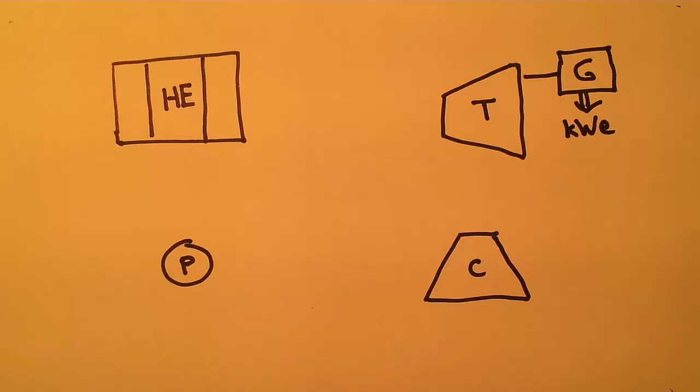From the outset of the project, we had already been given an outline of a potential workable solution. However, we found this design brief to be too specific, and Hal agreed to our revised scope, broadened to cover the following topics: a discussion of available technologies and all potential solutions, description and justification of the proposed design methodology,

detailed outline of design implementation, and complete design for manufacture, including a full set of engineering drawings, detailed parts list and specifications, assumptions, limitations, operating parameters, and expected output. Obviously, the project is centralised on geothermal power, and thus we will not be considering other energy sources, except in a potential composite system. Nor will we analyse the geothermal wells, as all the necessary details will be covered by assumptions.

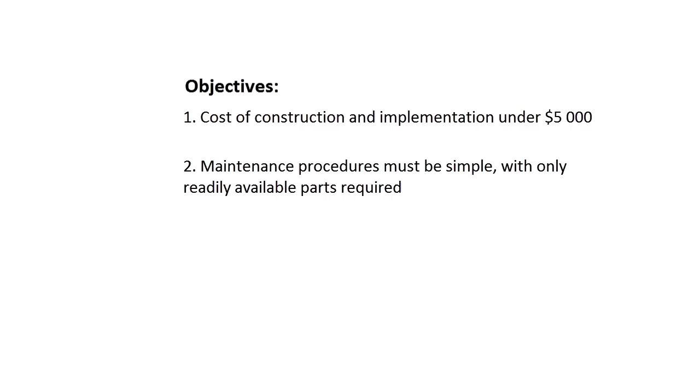Our primary objective for this project is to work with Professor Gensi to propose a simple, robust and economically viable energy solution for remote communities which incorporates renewable geothermal resources. Additionally, we have specified certain goals to coincide with Hal's expectation and desired outcomes. In order of importance, these are: cost of construction and implementation must be under $5,000, maintenance procedures must be simple with only readily available parts required, electricity generation should sufficiently meet basic needs of the community.

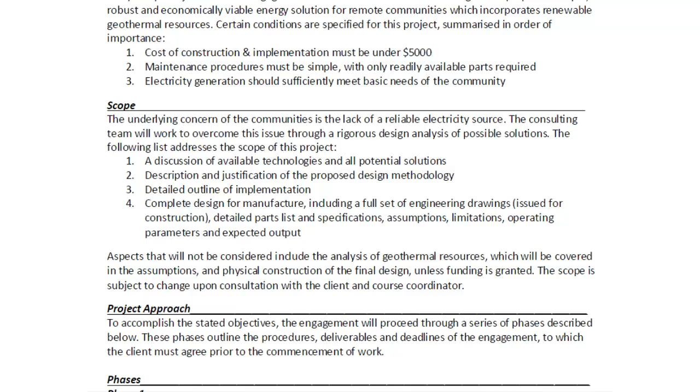We began this project by developing an engagement proposal letter for our client, where we clearly defined our problem, objectives and scope as we saw them. In this letter, we divided our project approach into 4 main phases, outlining the procedures, deliverables and deadlines of the various aspects of the project. The phases take up roughly half a semester each and can be described as follows.

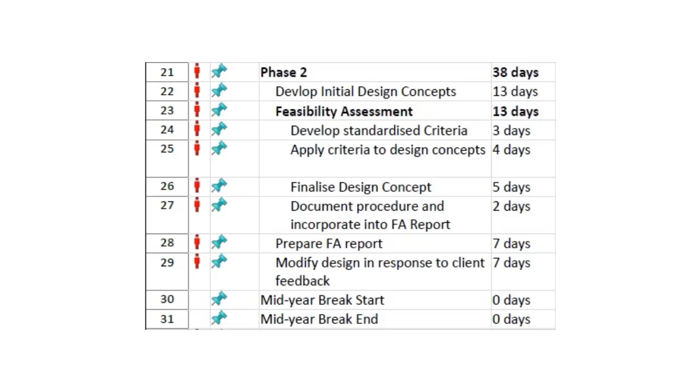Phase 1 is an introduction to geothermal power and will include a comprehensive literature review, both summarizing general principles and identifying applicable examples currently in operation, as well as accompanying assumptions to be carried into the design process. Phase 2 will involve further development and evaluation of competing design concepts, including a preliminary feasibility assessment for each concept. Then the design concept will be finalized and presented to the client for feedback.

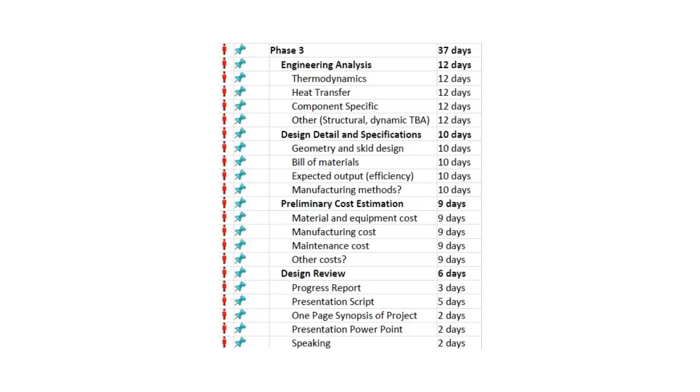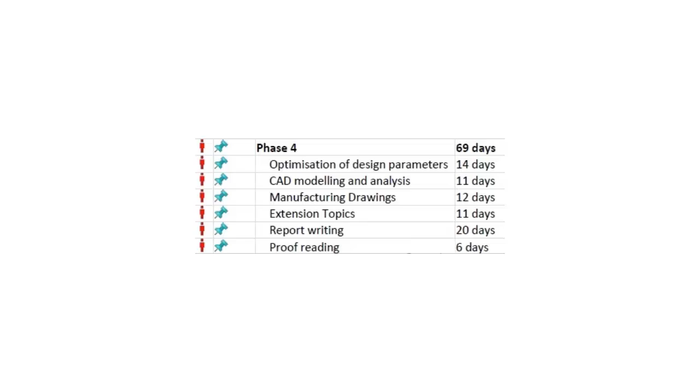By Phase 3 we will have the design concept finalized and we will begin detailed engineering analysis on all aspects of this design. Phase 4 will be the finalization of the design details, including specifications, operating procedures, expected performance, estimated capital investments, and ongoing maintenance costs.

My role for the first phase of the project is to develop and refine our design methodology, specifically how we are going to complete the project and what measures we have in place to ensure we remain on time and on budget. This process crucially extends to client collaboration, ensuring that the team is both fully aware of the client's expectations and addressing the right problem. We have achieved this through an engagement proposal letter presented to and accepted by our client. Accordingly, these tasks are tremendously important to the overall success of the project as they relate directly to client satisfaction.

My role for the first phase of the project is mainly to develop the prior art of the project with a specific focus on the existing solutions as proposed by our project supervisor Hal. This includes extensive research and understanding of the organic Rankine cycle and its uses. I have also taken a look at scroll technology proposed by our supervisor to develop a solid understanding of its operating principles. On the managerial side of the project, I have been heavily involved in developing work breakdown structures, Gantt charts, and breaking up technically orientated tasks and assigning them throughout the team.

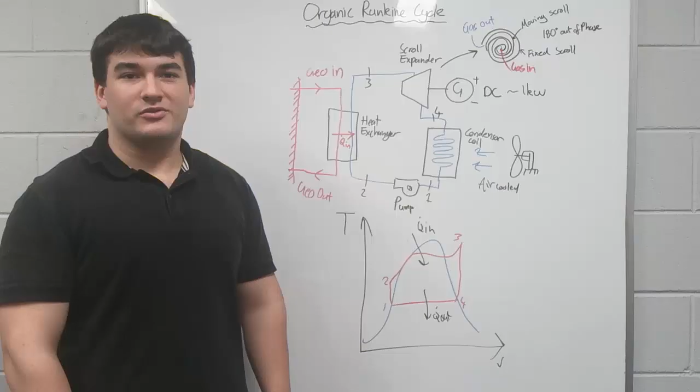Within the first phase, my role will be to construct the engagement proposal with the assistance of Morgan to give our supervisor complete clarification of the outcomes of the project. This includes a concise problem definition, objective, scope, constraints, and details and deliverables of each phase we intend to complete throughout the project. Some preliminary research has been conducted into various heat exchanger technologies that can be used in the system, including types, fins, advantages, and thermodynamic capabilities.

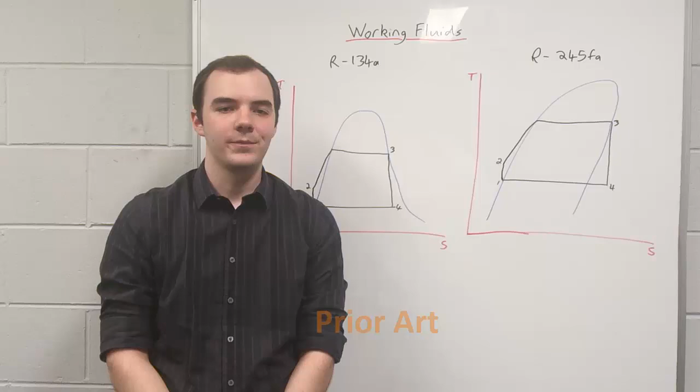My role for the first phase of the project is to assist Vlad in developing the prior art, with a specific focus on possible working fluids that can be used for low temperature organic Rankine cycles, like shown beside me.

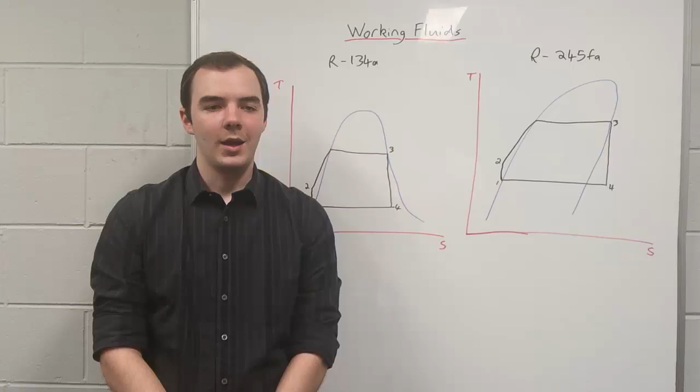This includes extensive research into understanding how to choose the correct working fluids for our situation and what good properties are for them. I have also taken a closer look at alternative technologies, which include thermoelectric generators and dry steam power plants, allowing us to critically analyse whether our solution is the best one.

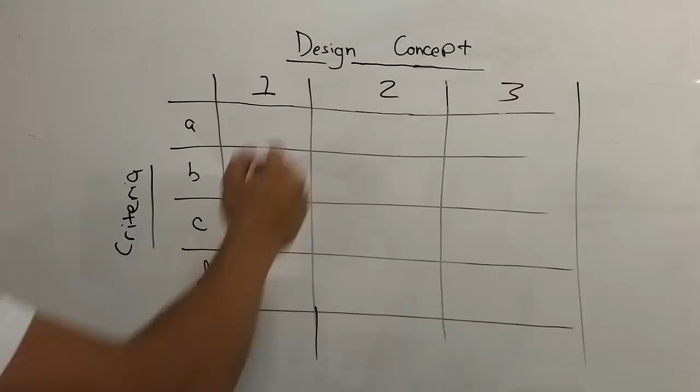For Phase 2, my primary task will be determining a list of appropriate standardised criteria which will be used in assessing the feasibility of each of the competing design concepts developed by other team members. Based on the project objectives, these criteria will be quantitative and result in the elimination of irrelevant or unsuitable options.

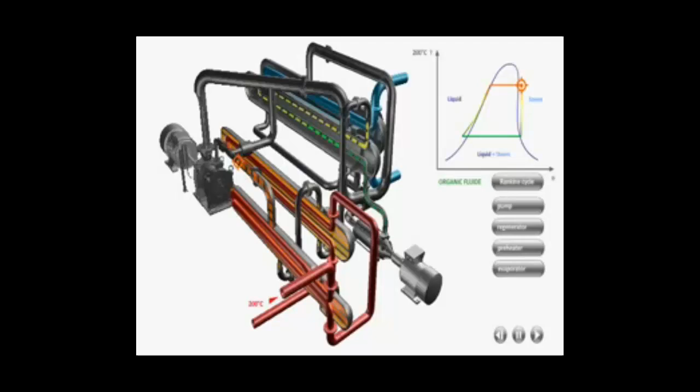For Phase 2, I will continue my development of the existing solutions with a greater focus on technical specifications and output parameters. I will be working closely with Mitch to develop and understand the alternative solutions and decide on the best approach to solving our problem. By the end of this phase, we aim to nail down the design concept, be it the existing solution or some alternative that we may yet identify, and begin technical designs.

With this phase, I'll participate in the analysis of specific cycle considerations to be included in the final design concept. Firstly, I will detail several options for the design that can then be assessed by the developed criteria. Also, I'll perform basic calculations and deductions to assess the feasibility of our proposed design, with special focus on the heat exchanger.

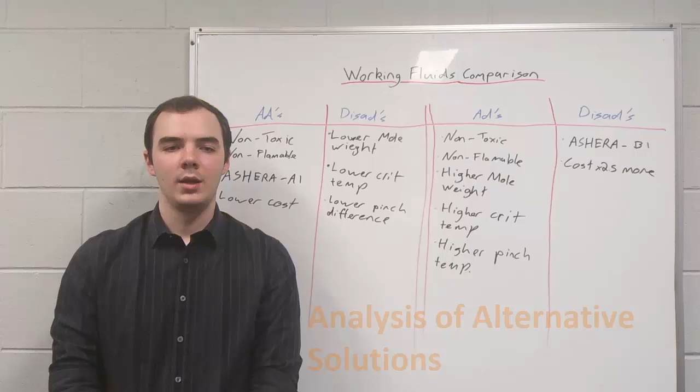For Phase 2, I will continue to develop my understanding of working fluids with a greater focus on how it will affect the technical specifications and output parameters. I will also be working with Vlad to critically analyse alternative solutions to ensure we are on our best approach to solving our problem. By the end of this phase, I aim to have chosen a specific working fluid to use and to nail down a singular design concept.

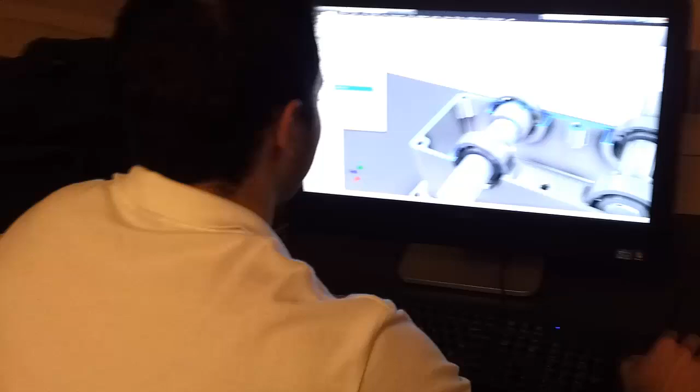My role in Phase 3 will involve engineering analysis, with particular emphasis on heat transfer problems. Importantly, this will draw on knowledge gained from an extensive heat transfer course I studied in place of MECH4552 while on exchange. I will also explore methods of constructing the power plant in terms of layout, geometry, and portability. Together with other team members' work, these results will be vital in evaluating the overall performance and determining design specifications.

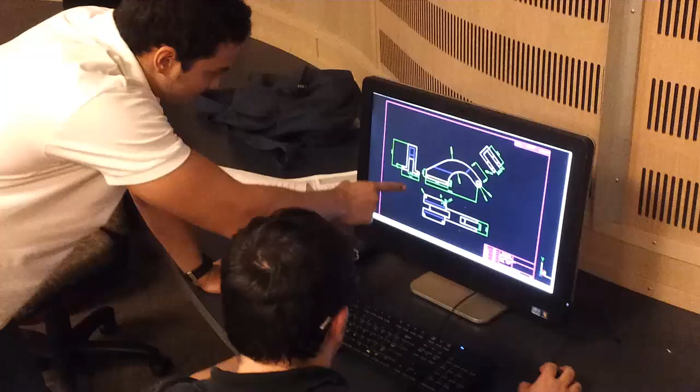By Phase 3, the design concepts will be finalised and I will be focusing on the thermodynamics of the problem, specifically at the turbine expander. I will also be investigating the electrical side of the problem, investigating how exactly we will achieve electrical power from mechanical work, and begin to record down our achievable outputs and initial cost estimates. Using my experience in CAD, I will also be closely working with Morgan on the 3D and 2D modelling of the skid design and layout.

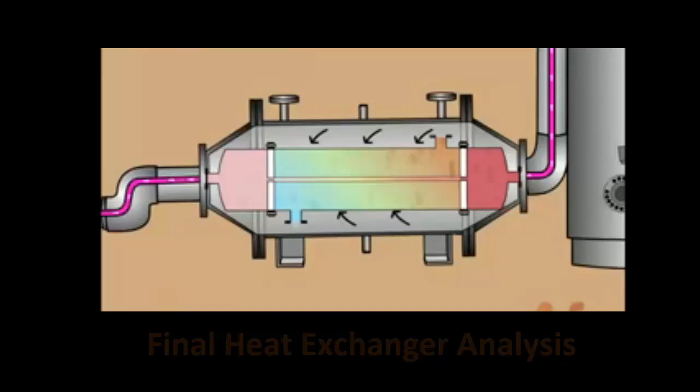During this extensive phase, I will perform the final thermodynamic analysis of the heat exchanger in the system, as well as any other necessary components. This includes a direct solution to all variables such as pressures, temperatures, flow rates, and heat transfer. I intend to develop the geometry and design of the skids with the assistance of my colleagues, as well as the costs associated with manufacturing and maintenance. This will all be documented within the progress report and used for the presentation.

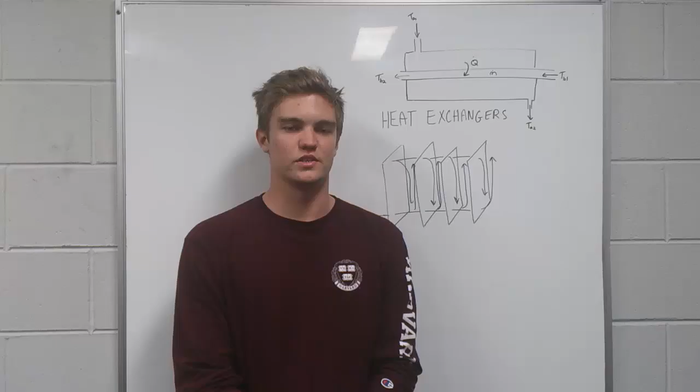For Phase 3, I will be involved in the engineering analysis, with particular focus on ensuring the thermodynamics and heat transfer sides of the project gel together, and helping both Vlad and Morgan with their calculations. I will also use my knowledge of working fluids to ensure the correct components are chosen, and begin to record down our achievable outputs, initial estimation for part cost and maintenance cost.

In the final phase of the project, I will help optimise the design, with my primary focus being CAD modelling and analysis. In addition, I will be responsible for checking and issuing the full set of manufacturing drawings. I intend to model the team's drafting procedures on those I learnt during my professional work placement. Like a recipe to any good dish, these drawings are an essential inclusion in the final project deliverables and complement the design report.

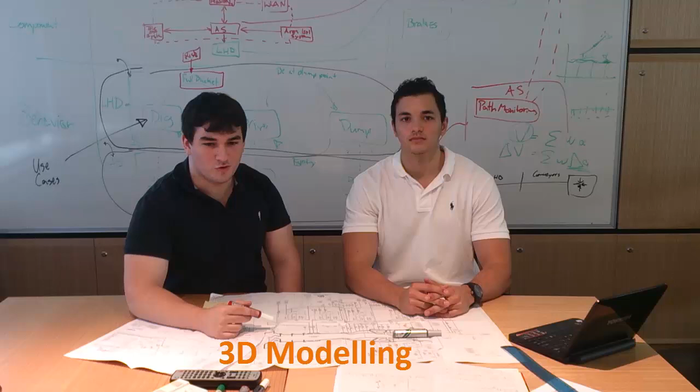In this phase, I will be working closely with other team members on the optimization of our power plant from a thermodynamics perspective, nailing down the best compromises between optimal performance and achievable values of pressures, temperatures, rotation, power, etc. Depending on the workload, I will also be closely involved in 3D modeling and 2D drafting with Morgan to develop a complete set of technical drawings. Towards the end of the phase, the final project report will also be a factor, and I plan to be involved in the writing of appropriate sections relevant to my tasks.

In the final phase, I'll be collating and documenting my work to the final comprehensive report. Additionally, any extension topics that arise during the course of the project will be investigated by me and included depending on their respective relevance or significance. Depending on the quantity of technical drawings that need to be produced, assistance may be given.

For the final phase of the project, I will be working with the whole team on optimizing the thermodynamics of the design, as well as providing assistance where required, whether it be helping Vlad with his 3D modeling or Morgan with his 2D drafting.

In this video, our group has outlined the process of our approach to completing this project, as well as our motivations for choosing this topic and our individual contributions to the team. We are now at the end of the first phase and beginning Phase 2, where we will be looking at completing our preliminary feasibility assessment and converging on a final design concept to begin detailed analysis.